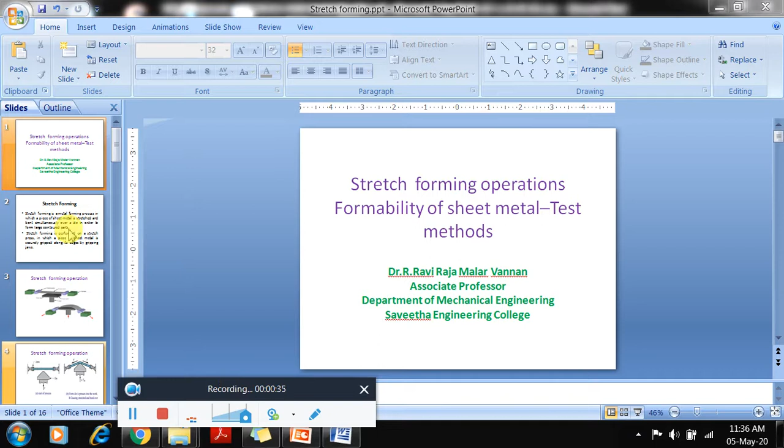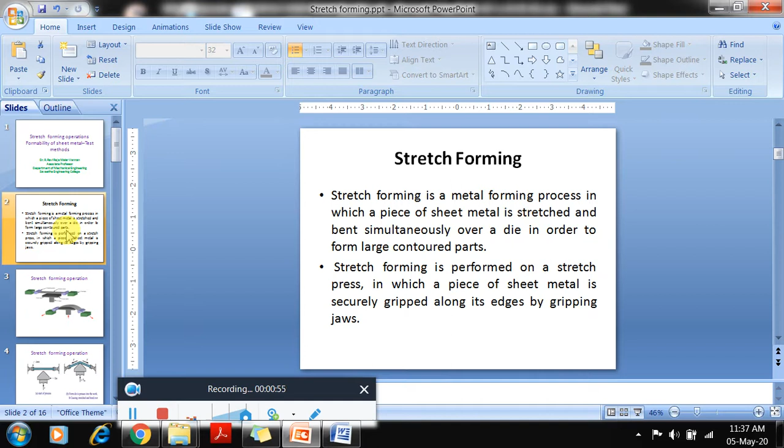Stretch forming is a metal forming process in which a piece of sheet metal is stretched and bent simultaneously over a die in order to form large contoured parts. Stretch forming is performed on a stretch press in which a piece of sheet metal is securely gripped along its edges by gripping jaws. Here we can see the stretch forming operation setup.

Here you see gripping jaws, sheet metal, and the form shaped die. Pressure is applied from the form shaped die upwards, and the sheet metal is stretched. That's why it is called stretch forming operation. We can get the required shape of the die.

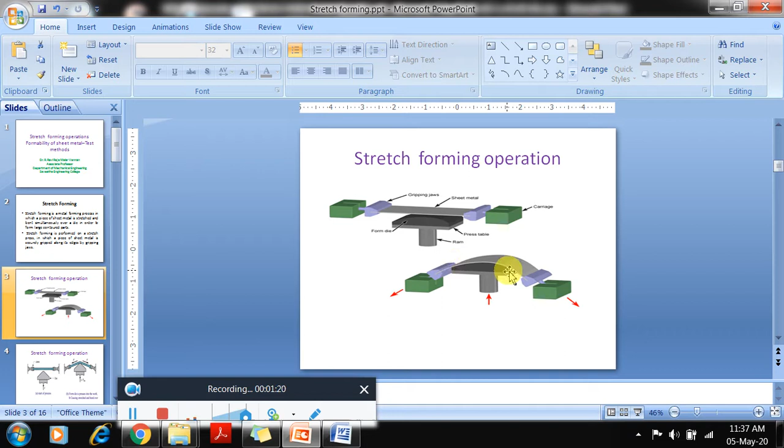Here you see another setup: jaws, die. Force applied from bottom, sheet metal stretched and elongated, and the desired shape is formed.

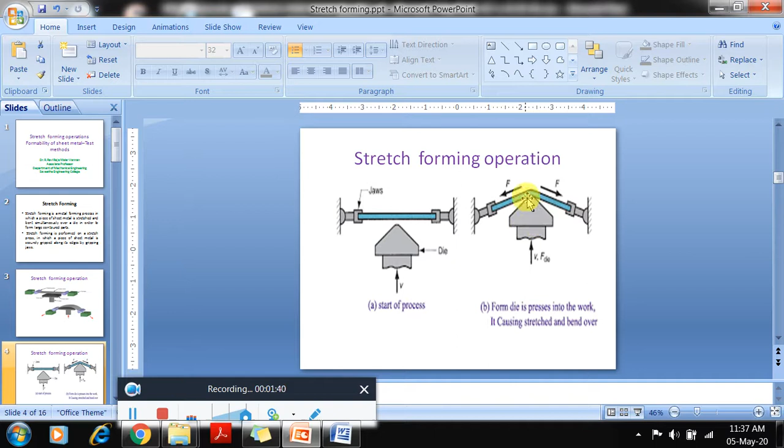In the stretch forming operation, the gripping jaws are each attached to a carriage that is pulled by pneumatic or hydraulic force to stretch the sheet. The tooling used in this process is a stretch form block called a form die, which is a solid contoured piece against which the sheet metal is pressed.

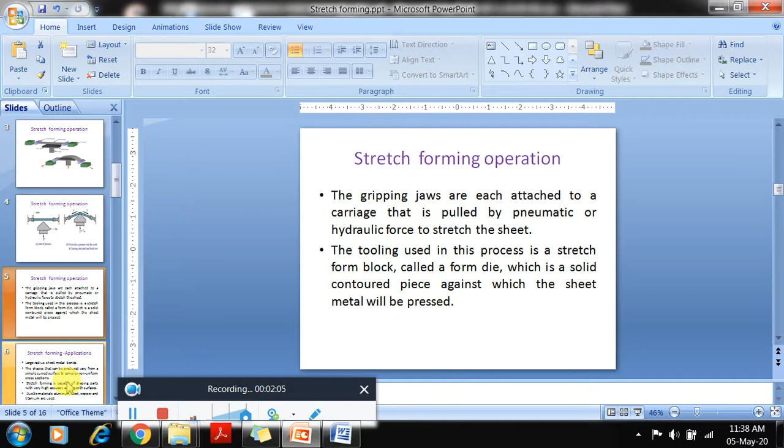Stretch forming application: large radius sheet metal bends. The shapes that can be produced vary from a simple curved surface to complex non-uniform cross sections. Stretch forming is capable of shaping parts with very high accuracy and smooth surfaces. Ductile materials such as aluminium, steel, copper and titanium are used.

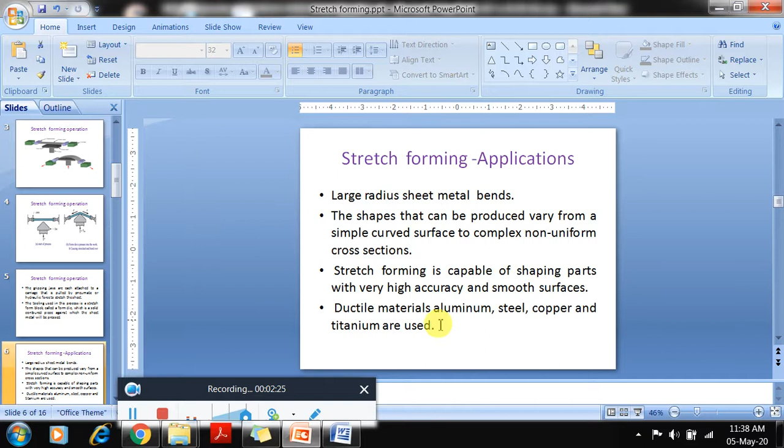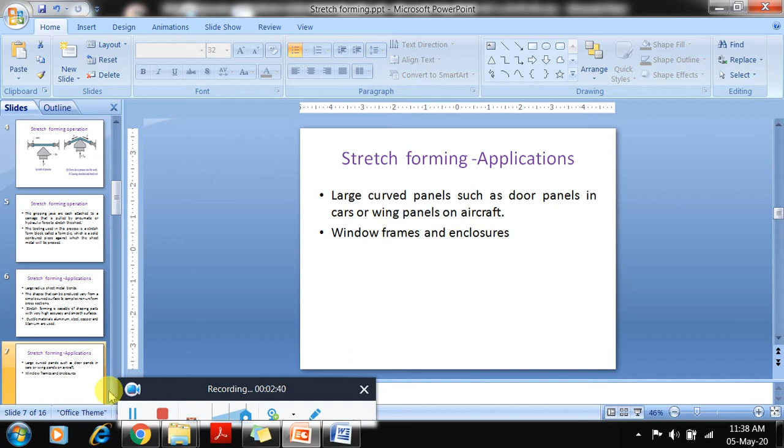Stretch forming applications include large curved panels such as door panels in cars, wing panels on aircrafts, window frames and enclosures, etc. These are the stretch forming applications.

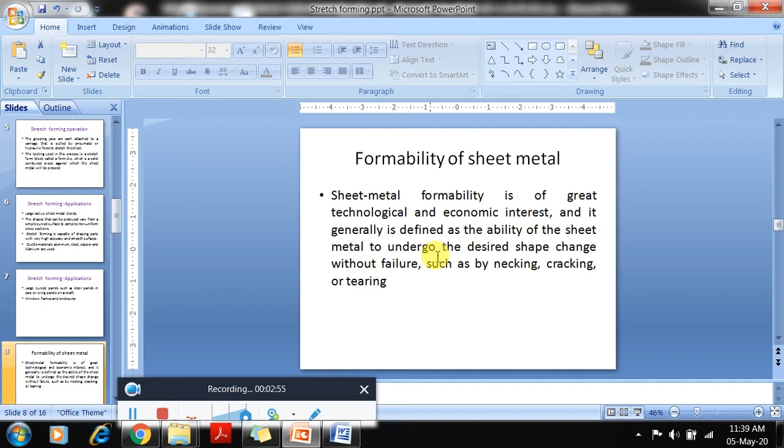Now we are going to see the formability of sheet metal. Sheet metal formability is of great technological and economic interest, and it is generally defined as the ability of sheet metal to undergo the desired shape change without failure.

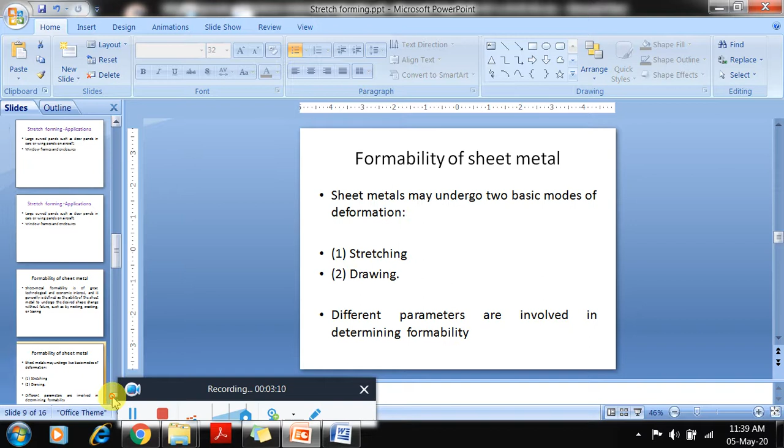In formability, there are two basic modes: stretching and drawing. Different parameters are involved in determining formability. Formability testing methods include ductility test, dent test, tensile test, and cupping test.

Ductility refers to the ability of material to deform plastically before it undergoes fracturing. Total elongation and reduction of area are two measures of ductility governed by American Society of Testing of Materials E8/E8M. The ductility test on sheet metal measures the distance in centimeters to which it elongates before breaking.

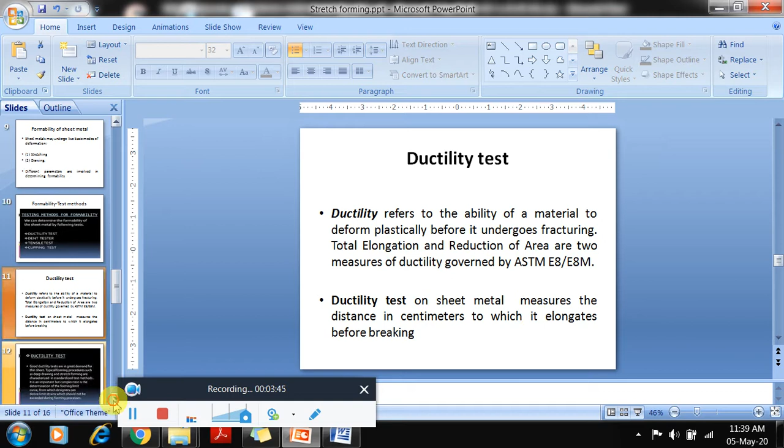In the dent test, we make an indentation on the sheet metal by applying a shock load. The depth of the indentation shows the distance measured. That is the dent test, an indentation measurement.

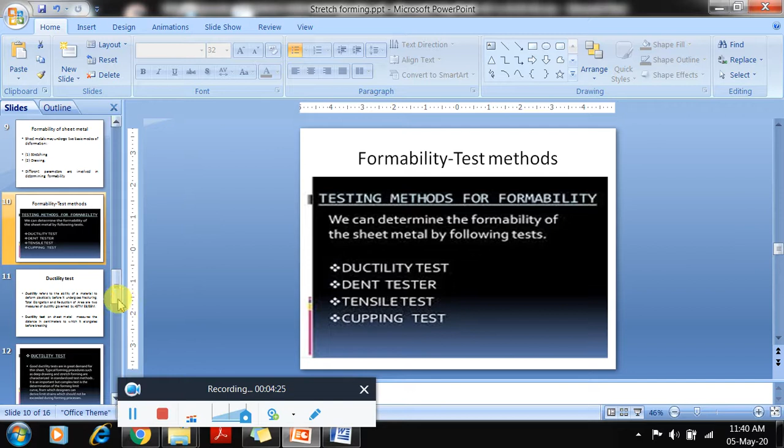Another one is the cupping test. In this test, the sheet specimen is clamped between two circular flat dies and a steel ball or round punch is forced into the sheet until a crack begins to appear on the stretched specimen.

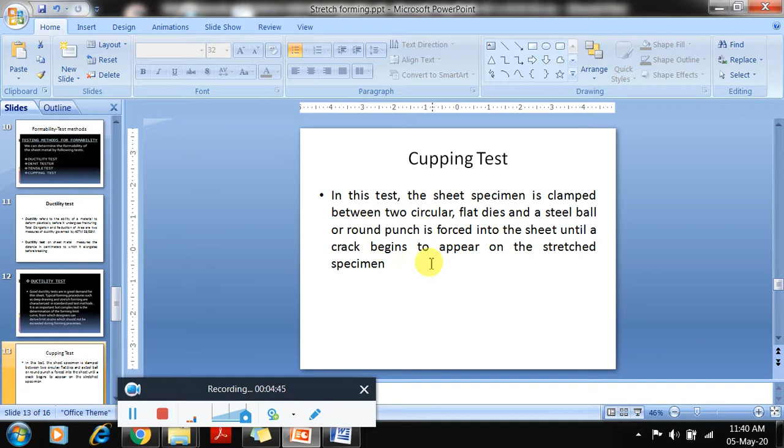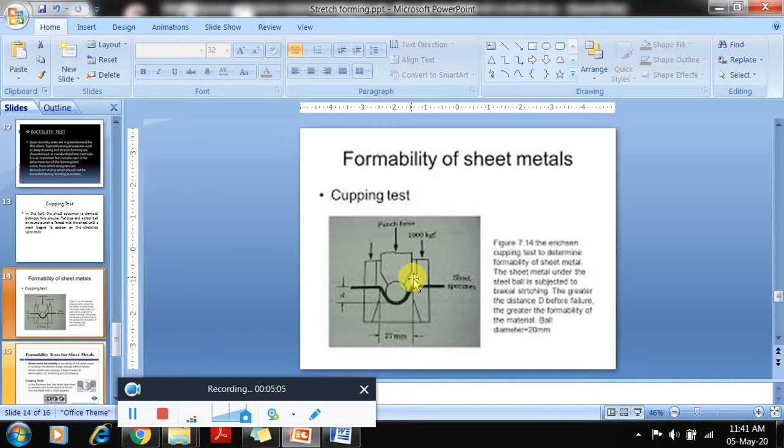Here is the setup: ball, punch, sheet metal, force applied, and here the shape is formed. So we can get the measurement, for example 27 millimeters in length. Different shapes can be obtained. In this setup you see the punch and the material formed.